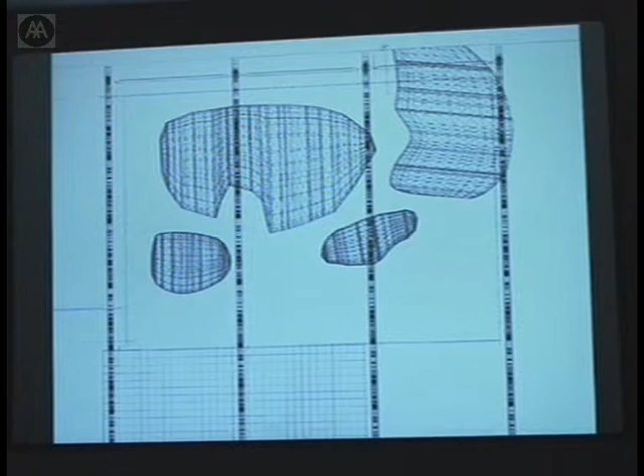These are very early sketches, ideas about—we had, in a sense, one of the big problems with Pompidou was that the floor for the space really was the only thing we could work with. We couldn't work with the walls, we couldn't work with the ceiling. So we decided to break the program down into these 4 elements and start to work with the floor, introducing the elements by slipping them under what we called a conceptual carpet, which was the floor, and deforming the carpet upwards.

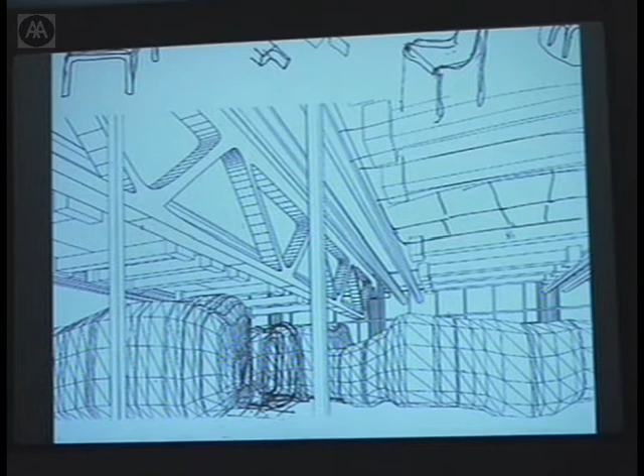These are part of a very simplistic sense of the structure of the space that exists. But this grid that's stretched up onto this carpet, through this deformation, is a grid related to the Centre Pompidou, in the way that right across the whole surface of the plan, we have increments coming down from 80, or going up from 80, 160, 320, 640, 1280. These become both the increments—the infill right through to the structure—and the determining elements.

So from that grid, we decided to use both the grid and the floor as our surface to work with, because of these constraints. And also, I think, because we wanted to take something which was neutral in its vocabulary, avoiding the vocabulary of Centre Pompidou, which is so extraordinary and specific that we all know about the tubes, color-coded in terms of a 60s structuralist approach to the outside and the inside of the building.

Our thing was to try and avoid that at any cost, but take something highly neutral. In this case, it was the grid and the floor. But at the same time, by deforming the floor and moving upwards with the different programs, we could create something new but working somehow with the building. That was very much out of an intention to make an intervention in the space and forge a new identity, a dialogue with the space.

That seemed very important, dealing with the history and what was architecturally implied with Pompidou, but was in some ways never fulfilled, and then moving on from that, forging ahead in a sense and trying to create something new from it.

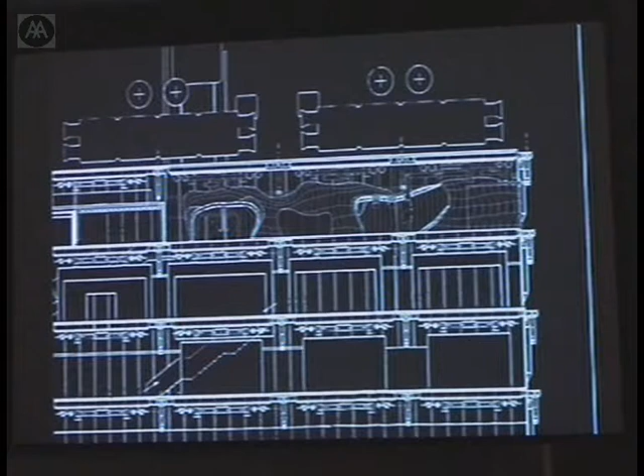This is the ducting on the outside of the Pompidou. This is the ducting on the lower level under the roof. These are air ducts, the big ones, and then you have electricity and water. So if we keep on moving, these are in a sense just conceptual developments of the piece.

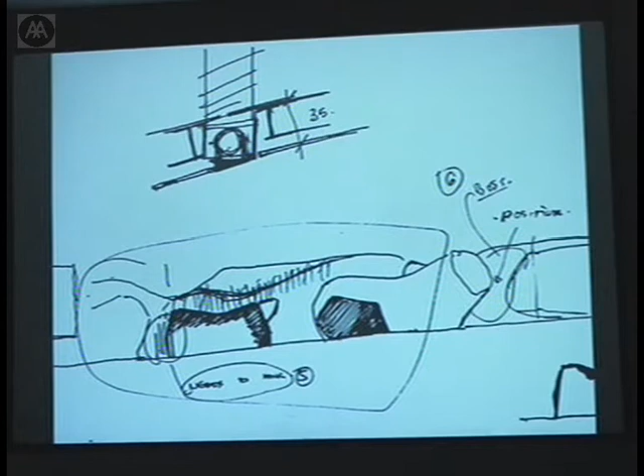As we move through, we come finally to a plan. So we jump from the conceptual stuff—I'll make a couple of fast jumps, otherwise it would prolong the issue. The entry is here, and the entry is here.

You come outside across the terrace at night, or you come through here, depending on what program is being run inside Pompidou. Pompidou is a very interesting situation—it's not just a restaurant, but for them it's also a meeting room, a private meeting room for Pompidou, so we can close up this volume.

It's red because, in a way, it tips our hat towards a space, a building, that Pompidou lived in for a couple of years while the centre's administration worked there, from '98 to 2000, while the whole building was being redone. We took the red, which was done by a fellow architect, as an identifying thing and as a memory for that period when the administration would come back into this building—also a clin d'oeil marking their space, because otherwise the doors open and the space becomes used by the rest of the restaurant. So there's a kind of double programmation, which is quite important.

Then the second space, important as a double programmation space, is the bar. Inside that bar we have a video presentation of artists presenting their work concurrently or coming up within Centre Pompidou. So Centre Pompidou is doing the programmation for the video within the bar, and that's interesting—you've got this kind of double overlap going on.

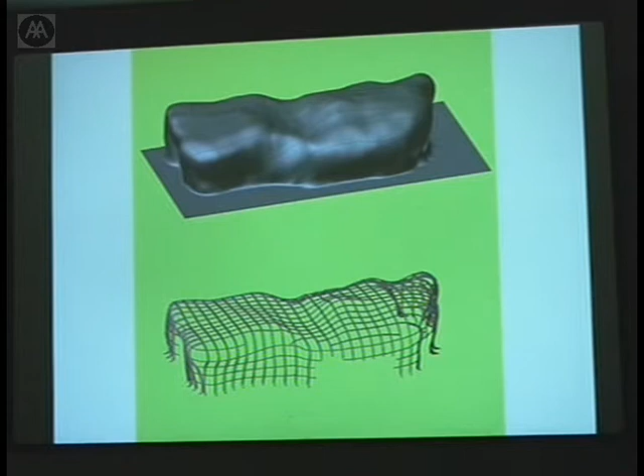For us, it's essentially a skinned project, so the structure becomes a secondary element, but important to show. We had to model all of these things, developing a way to bring the floor up onto the volume with quite a lot of precision.

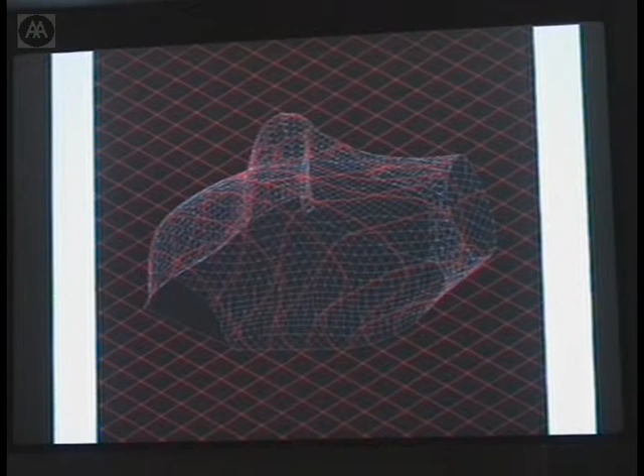Each volume also sits on hydraulic pumping springs, because the building of Pompidou moves backwards and forwards something like 17 centimetres from one side to the other on the short sides. So we had to make these volumes independent from the floor itself, as well as account for movement joints coming through the volume. Essentially, it led to the idea of putting them up on springs—under each volume it's essentially like a car with springs around all the edges.

These are studies. This is what I was talking about. Every one of these is a spring box, so the whole volume sits down. Extremely light volume. The structure is a 1 centimeter thick aluminium plate, and the skin is 4 millimeter thick aluminium. Essentially what we did then was we found...

I should tell you that Pompidou initiated the competition but did not have one centime, one penny, to pay for the project. So we had to create another competition with Pompidou to find an exploitant, someone who would both run the cafe and restaurant but also pay for all the work. We found a group called the Costes, who have become quite famous in France, being supportive of important pieces of design over about 20, 25 years. This family actually ended up being the ones that decided to build the project in its entirety. So it was a wonderful history of having a great patron, a great client in that sense, and something that surprised us all the way.

Anyway, the point of all that was to say going into fabrication, we had to find a company that would build these, and essentially we found boat builders in the south of France, who make yachts, a number of America's Cup yachts to their credit, but had never built anything to do with the architecture world. It was a great moment because this stuff's becoming less and less unusual. I think now we're working more and more with industries to do with aviation, boats, sport. More and more architects are diversifying. But certainly for us in 99 or 98, that was an interesting thing to do.

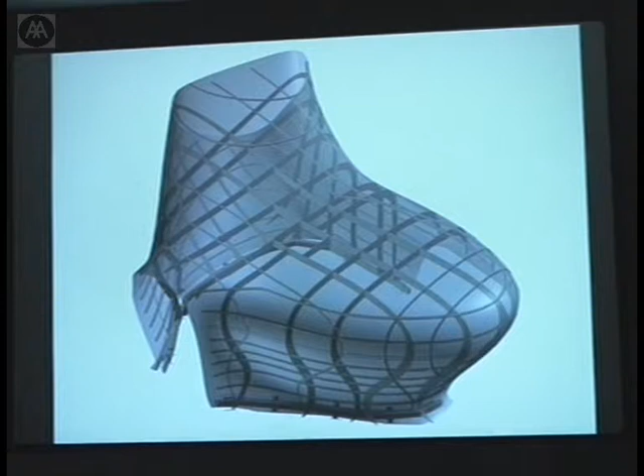I think it's still quite unusual. Luckily we also had a reasonable budget for this project, and we were able to accomplish things which are probably a little bit harder normally to accomplish.

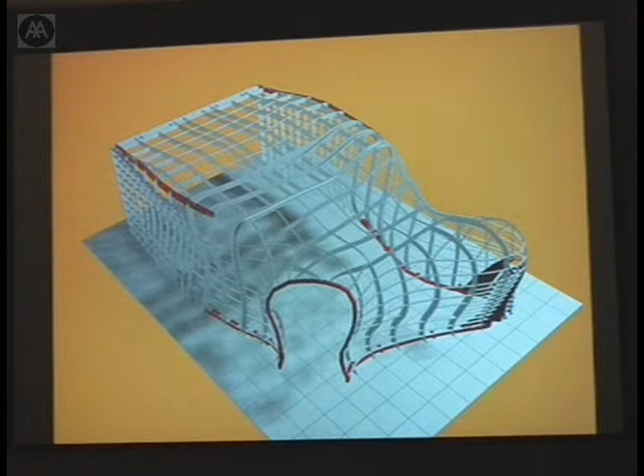Anyway, these are just diagrams showing the structural and skin studies. So we had a huge job of sending our numeric dossiers down to the boat builders. They in turn took the dossier from our software and translated it into software which they were using, two different softwares used only in the boat building industry, and then had to send it back to us, and us having to do the transformation. So it was a phenomenally laborious project, but under this kind of paranoia of time, working for the new millennium, which was good because it pushed the project.

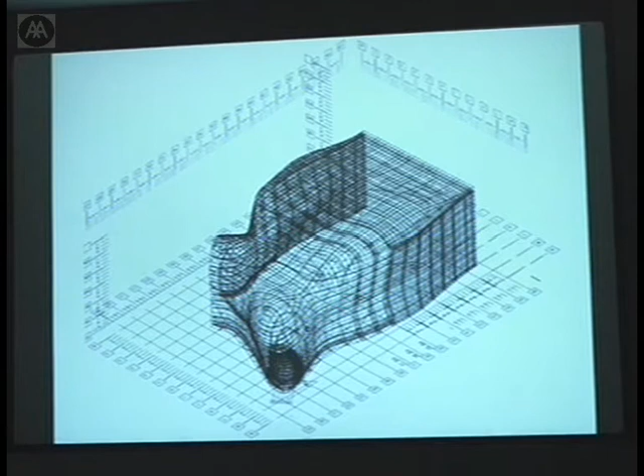These are studies by the engineers. We had a lot of lateral and vertical load studies of the piece. We worked with the engineers of RFR.

What was important for us was not actually to touch the appropriation, but to somehow direct it down into the volumes where we need it, but nothing more. So there's also an important word which would be appropriation, or redirection, of an existing system.

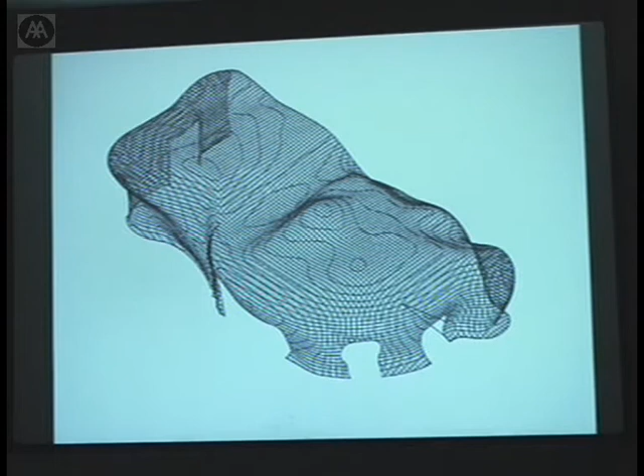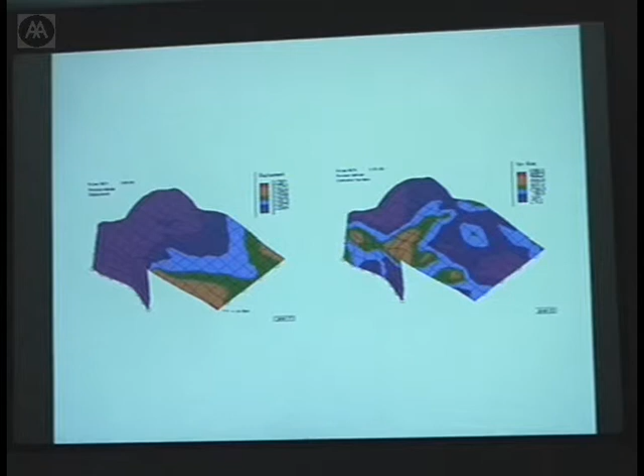Okay, so these are studies, of course, loading studies, displacement, deformation studies. And of course, these are pattern drawings.

We move on into the fabrication phase, which was an extraordinary experience because these are gigantic pieces that we had to build in their entirety, but each piece was already, a little bit like the hand sketch, broken down into a chunk. And the chunk actually corresponds with the maximum size of the lift of Pompidou, which is a gigantic lift.

But we had to bring every chunk by truck up to Paris and then deliver it between 6 and 7 o'clock in the morning, delivering these into the space.

So what we did in the south of France was we built all of these volumes as whole things, and then unbolted all of the pieces. So here you've both got the structure and the skin.

What was interesting in this, we worked with a machine which the company bought, thank God, during the phase. This is, you can see the size of the shop—it's gigantic, like really an aircraft hangar from much bigger boats. But they bought a machine called an Ecold machine, E-C-K-O-L-D, and it's really like a sunflower, which is an extraordinary machine that actually comes down on the surface with thousands of points, which either push down and stretch out, or stretch in, creating either a concave or a convex curve.

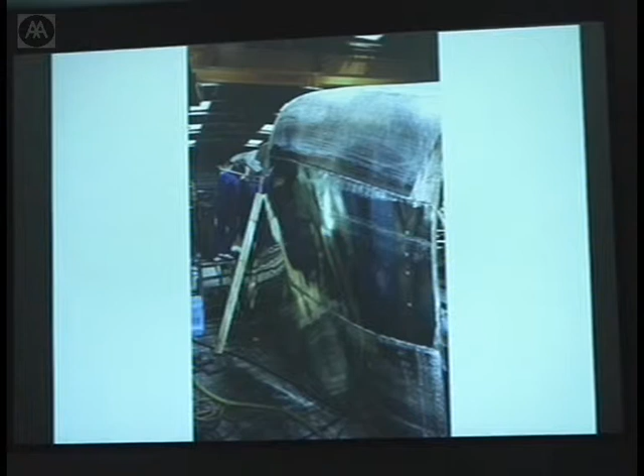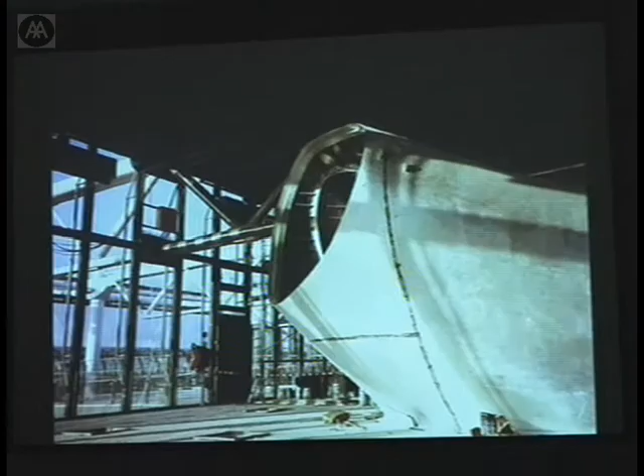And then once inside the Centre Pompidou, once having delivered the pieces, actually recoupling, rewelding, rejointing everything on site. So we had what was extraordinary—we had parallel crews. These guys that were usually building boats actually displaced and lived inside Paris for about 3 to 4 months, building these and receiving the stuff by truck from their own company. So that was quite an experience.

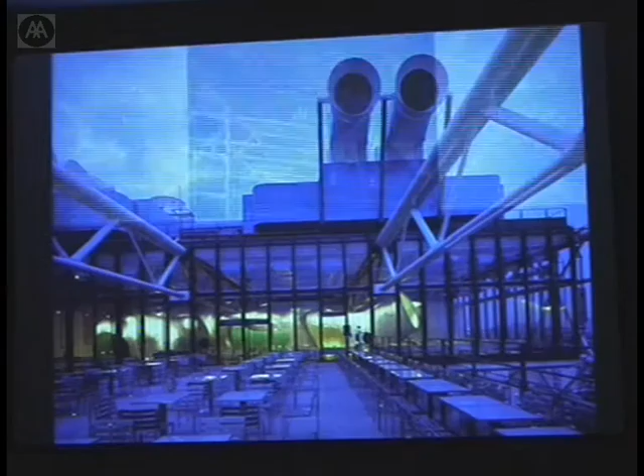And then here we are on the terrace. So it's an aluminium 4mm thick skin, extremely thin, but what's fantastic is by bending all of that, you can really accomplish some fantastic structural feats. I mean, these doors, in the end, become actually a lot of the structure, just through the pure bending of the material.

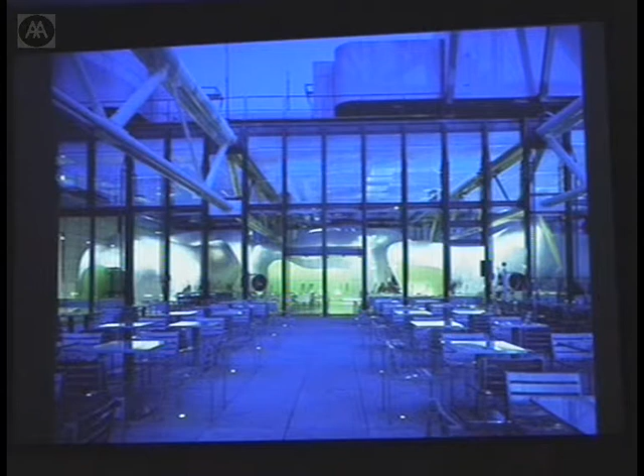And that's something we wanted to reveal also around the edges. There's a whole kind of thing about how we make the cuts—there are two kinds of cuts. Essentially we wanted the experience to either cut into or chop to create, for example, the windows. But essentially we wanted the experience to be very brutal, where once you were inside the volume, you really felt you were inside a closed volume, and it just happened to be cut in order to access light or physically enter into it. This was something about the continuity of the surface, while also having to work with the functional aspect of getting in and out of the volumes.

Okay, so these are then, of course, views around. Your floor is aluminium, your volumes are aluminium, coming severely down at some places and then deforming up in other places.

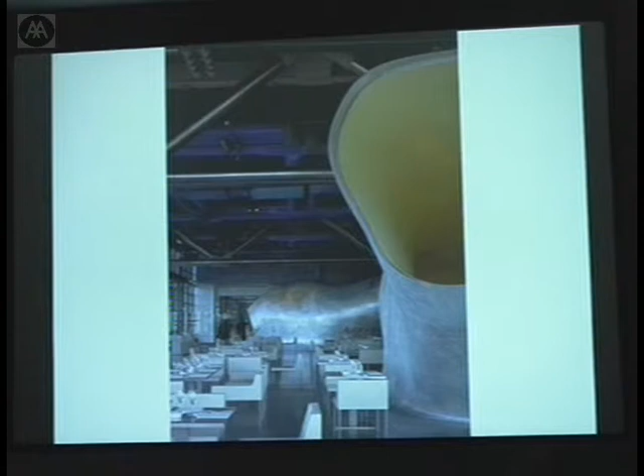What's extraordinary is the light inside the space, because, as you all know, Paris is a city of light, and the changing light is kind of fantastic. Really, here on the top floor of Pompidou, we have a panoramic movement of light right around the city, which is quite strong and forever changing throughout the day.

So inside each volume, we create a second skin, which is a rubber skin—again, 4mm thick. Essentially, we wanted that to be, in a way, almost like a suit, or like a kind of diving suit. We wanted the inside to be a floor which was, again, deformed up onto the surfaces. Here you see the aluminium left as simply as possible, the 4mm, and then you see the 4mm rubber here.

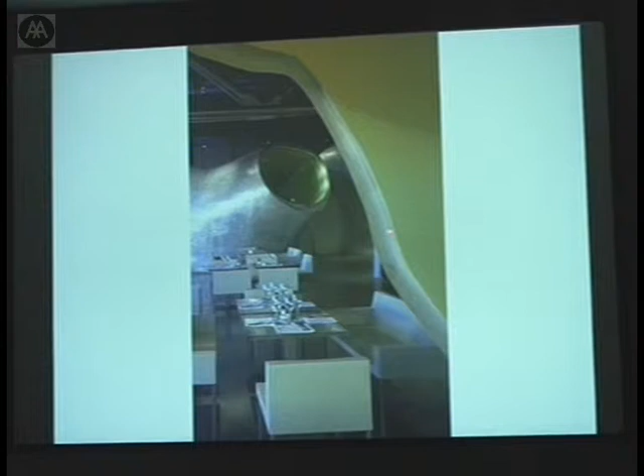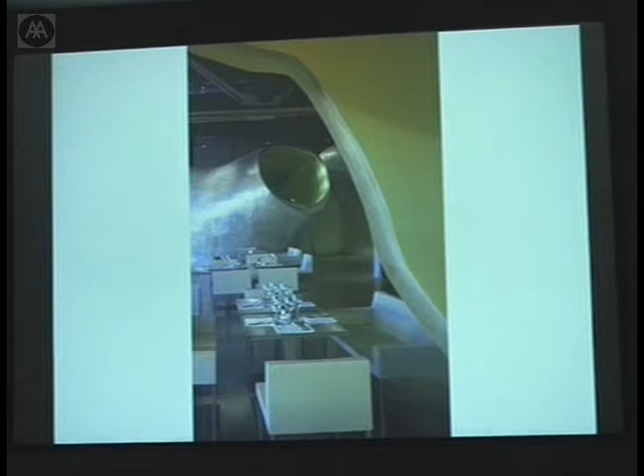And then there's an aluminium detail, an extruded element, which is set back in behind that. But we essentially wanted the two skins to read as one being a very soft, warmish interior space, and the other offsetting this kind of supposedly cold—but aluminium actually isn't that cold really.

This is moving around inside the bathrooms. The windows are important for us because they're moments where we get rid of the foreground, in a way, and jump the eye into the second and third foreground. It's all about people, for example, in the bathrooms looking at the ceiling, looking at how the ceiling is interacting with the bubbles. So we're trying to direct people's attention to certain things.

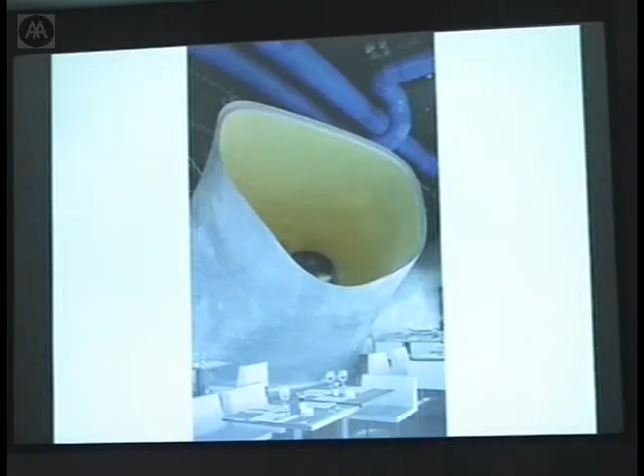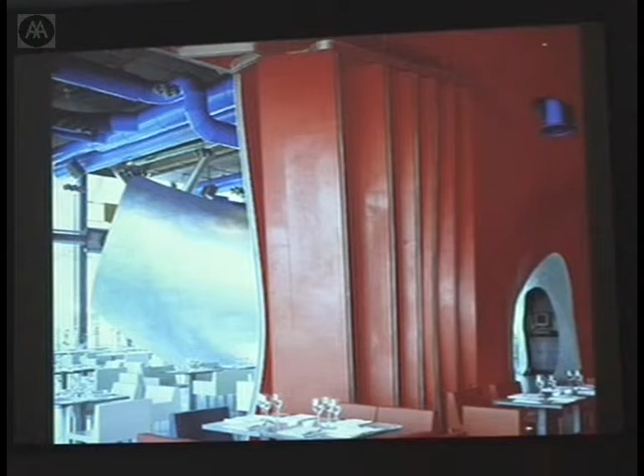This is the red volume I was talking about, which is closed by these big, gigantic sliding doors. Each of these panels is unique, as they're just cut out of the skin, and they close up to essentially form this as a private dining room, either for Pompidou, or it's open with the space itself. The rubber, the air being brought in, nothing fussy about this. The idea was to really keep it as brute or as simple as possible.

Now the next project I wanted to mention followed on from Pompidou, and it's essentially a bookshop in Paris. The lady who is our client for the bookshop came to us with an extremely small budget, but a great passion for selling artists' books. It's called Florence Lowy, Books by Artists.

Essentially there are books either conceptualized and fabricated by someone else, or literally fabricated by the artists themselves. An example would be pieces from the 60s and 70s, like icon pieces such as Ed Ruscha's Sunset Boulevard, being an example of an artist's book, or there's books by artists.

What's interesting is, as I said, she had a very tiny budget, and another problem: she had a space where half of her bookshop had to be stock and half had to be on display, in the same space for the public, so you would be in the space but might or might not be looking at her stock room. So instead of cutting the space in two in a caricatural way, we decided to keep the space in its entirety and make part of the stock room part of the experience of buying a book.

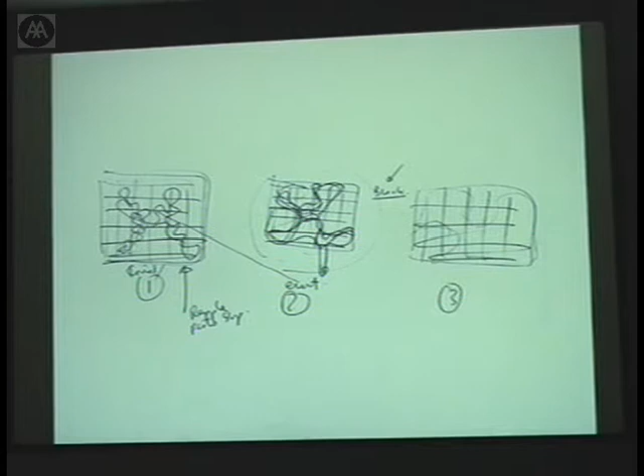By taking that matrice, which is really a 4 meter high volume, 3.5 meters, on a 45 square meter floor plate - very tiny really - we created this huge volume of books. Then this kind of movement path around these volumes created these extrusions, these vertical extrusions from this idiosyncratic movement path.

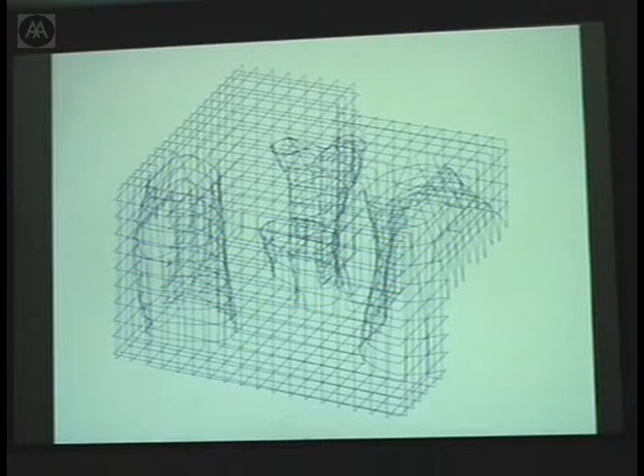By doing that, we wanted to evacuate all of the area which would be a circulation zone, and the zone that would be the leftover, which we called the decored object. So we had a coring and a decoring process, which then produced what we call these book totems.

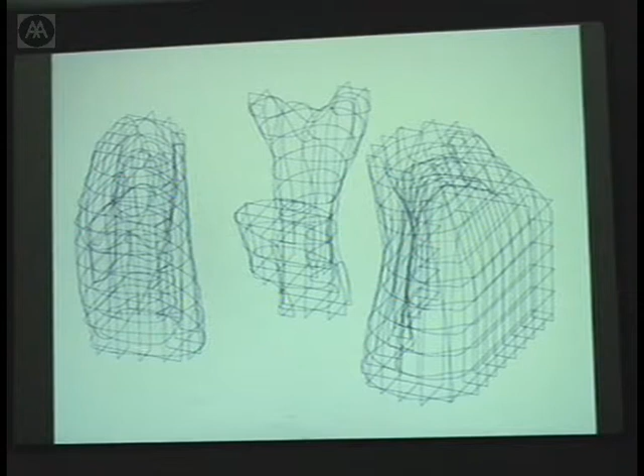But then the problem was not the totem itself, but also, which in a sense we'd prefigured, the issue of the books and the stacking - why not put the books on the inside of that totem because it was so large, and keep the outside for the spectator that walks around. So that's what led to these things, and this is the space.

The space is an 18th century building in the 4th arrondissement. We didn't touch it—all we did was really paint the walls and replace the floor. Essentially the intervention takes place in the floor.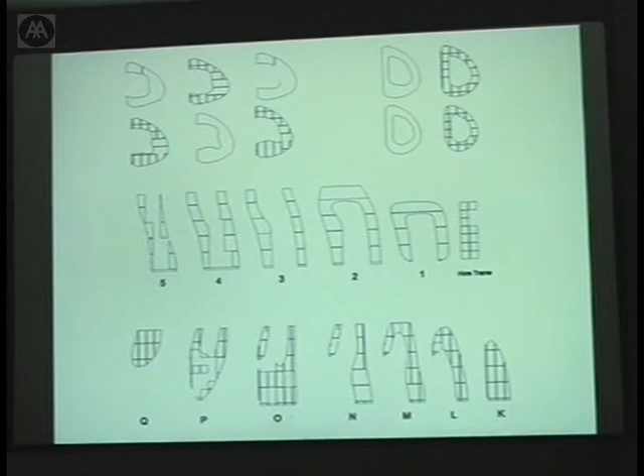These are the two volumes I talked about, which are empty, and these are virtual outtakes of that. Again, patterns of that, and the fabrication of that, done in Italy.

What for us was kind of extraordinary, and I mentioned that in relation to Pompidou—Pompidou was a skin project. We became quite fascinated, and that's why I wanted to show Pompidou. We became extremely fascinated with the structure, but we don't actually see the structure of Pompidou.

These are parallel things anyway. The book project being what it is, but I think what also helped lead to this was the interest in the Pompidou project—in the sense that the structure becomes both the volume and the skin; the skin is no longer there, the structure is the thing itself as well as its own structure. I think it becomes a very interesting development from the Pompidou project, one that maybe even interests me more, really.

Because of that, we said, well, why can't we, given all the numeric machinery we're using... Pompidou was certainly using artisanal, hands-on processes to make the exterior skins. In this case, we actually wanted to be absolutely hands-off on this project.

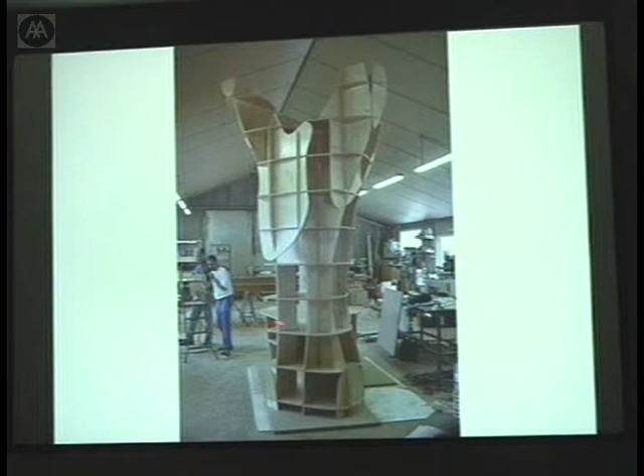We brought it to such a degree that the wood we were proposing already had a very thin melamine laminate on both sides, so we didn't have to varnish it. Essentially it's a 3D cutting machine which cuts each plate vertically, and then the plates are assembled much like an egg crate. So the hands-off aspect of this project is very important for us—seeing how far we could go in actually creating a fully numeric project.

So these are, of course, the fabrication stages, breaking the thing down. The whole thing breaks down into a series of donut-like elements, which are then joined using a kind of peg jointing inside the thickness of the plywood.

So we can see the beginning of the empty volumes up here. These are the volumes finished in the space. This is how we propose to show the books.

When we'd finished—or actually before we finished—Florence at one point was extremely nervous. She came to us and said, by the way, how did you think of doing the A to Z? How does that work in your space? And we said, well, it really doesn't.

I think it actually works in an extremely idiosyncratic way—it doesn't have an A to Z, basically. You come in and there's essentially groupings of interest or subjects. In a way I like that; I think it's much more intriguing and much more interesting. And certainly she was the kind of client ready to do that.

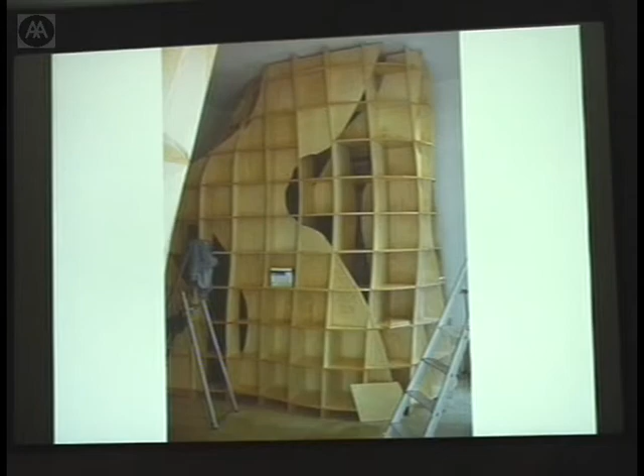And then all the books are stocked, of course, for the public on the outside. That's inside one of the volumes, looking up vertically.

So the next project I wanted to show you was a theatre in Rouen, in Normandy, which we actually finished more recently, but won a little earlier than the date shown here. Like some of these projects, it's a horror story of planning and timing. We had a mayor who was replaced by another, who was replaced by another, and from concept through to finished product it was about 7 years, which is extraordinary. By that time you're almost forgetting what you did. But thank God we got the thing built. The concept was very simple, but the project and the space we were working in was rather complex, and certainly its history was complex.

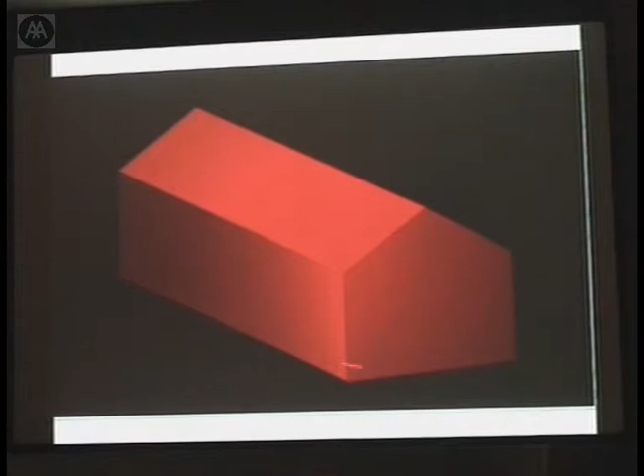I'm not showing you the building itself, which is unfortunate because I did have some images. But the building we worked in was an old theatre that had been converted in the 1970s from a cinema, which was itself converted around 1915 from a series of row houses. These row houses essentially formed a gable element like this, cut into about 3 or 4 row houses.

What we decided was that we were extremely interested in that history. We thought it was important to somehow go back and realize the different aspects of that history. So we took, in a way, the domestic volume, because that was the first history, and then the next history, but also the last history, which was the theatre.

Now, the competition asked us to improve two things: one was the acoustic conditions, and the other was the sight lines. There were two major problems, because for a cinema it had worked perfectly well, but for a theatre, of course, the two things are too contrasting. What we essentially had to do was make a much steeper floor.

So we had to push the real floor, change it, and create a new false floor. For the acoustic problems, we had to bring down the ceiling and create a series of faceted, chopped layers, which would give us the acoustical effect we wanted - a fast rebound for the actor on stage, but also other sounds coming into the auditorium and rebouncing back for the public. In the back there was a problem of absorption, but we didn't get involved in that.

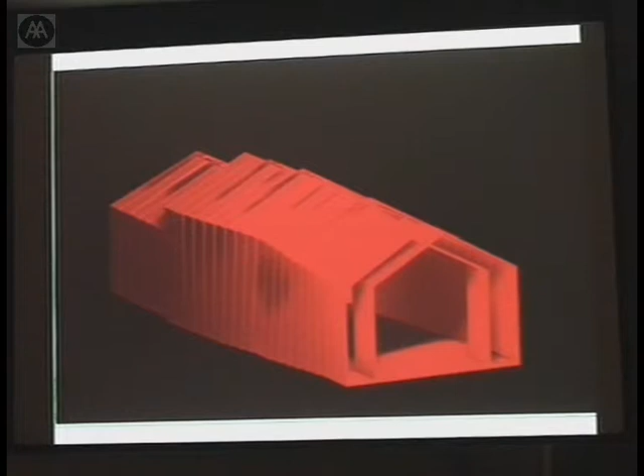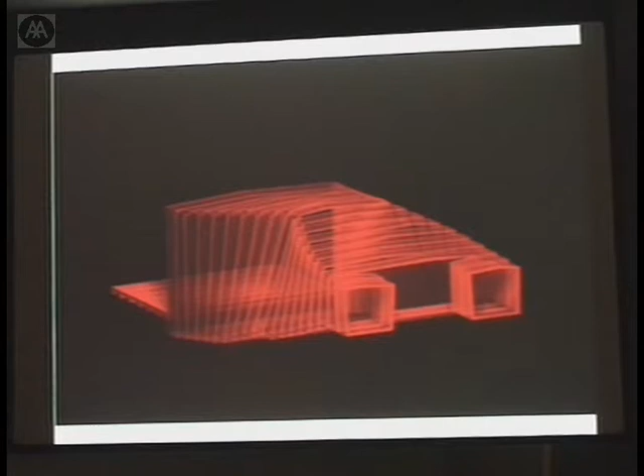So then we come through, and the piece becomes more and more deformed. We knew where our levels had to be, and we also knew we had to get two exit and entry openings into the volume from this end. So that's why the thing starts to deform. And then ultimately - well, you saw the last image anyway.

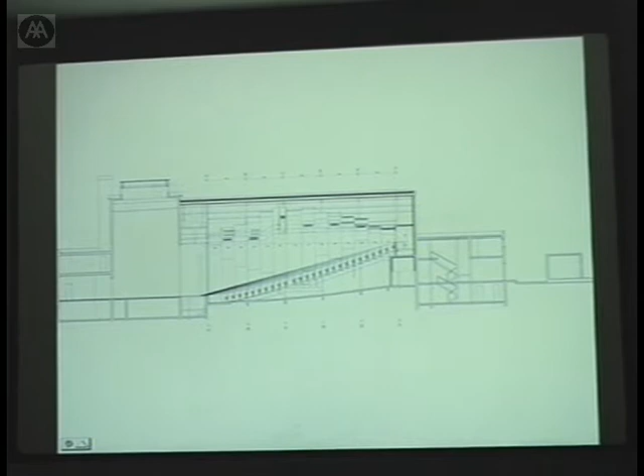Ultimately we come to this section. This is the existing building, and this is the existing rake I was telling you about inside the cinema space. And then ultimately we come to our new piece - really it's like a kind of stomach within an earlier building. If we keep going, you have this kind of slicing thing going on, and that's the piece in section.

Again, it's an extremely low budget project - we had very, very little money to play with. Really these are wood panels that are painted, very simple, but they create, I think, and apparently everyone agrees, a very rich acoustical quality inside the auditorium.

Maison H is a house that, in fact, we've never realized. It's a project where an extraordinary client came to us, who had been one of these great French success stories with the internet, created his own industry in a sense, built his own company, went on the stock market, and became extremely rich in a very short period of time.

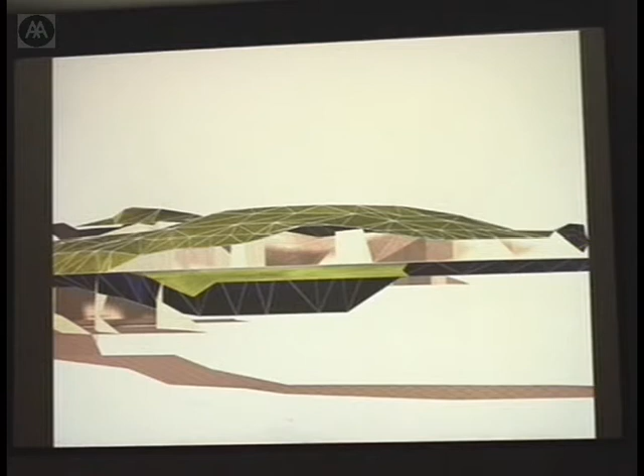So we were very interested in this issue of paths. And then actually also trying to almost treat the whole site as his house, which is when I was talking about the 2.2 hectares, that's why I thought it is for us quite an important notion. So that the house is no longer an object, the house is the landscape, or vice versa.

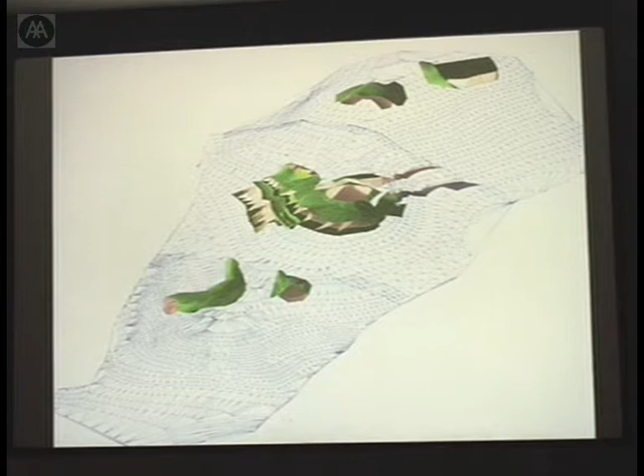And so these are very early studies where we became sort of interested in trying to find this relationship between paths, the land, an interior program which would somehow be both half in the site and half out of the site. Where the site itself became kind of ambiguous as to where the actual site ended and the house began. Here there's some kind of crude beginnings of those elements.

These are different pieces. This is a kind of tennis court thing. This is where he wanted a space for a sort of Zen meditation. This is the breakfast. This is the lunch. This is the major house element itself. And then some of these became a bit more developed later on.

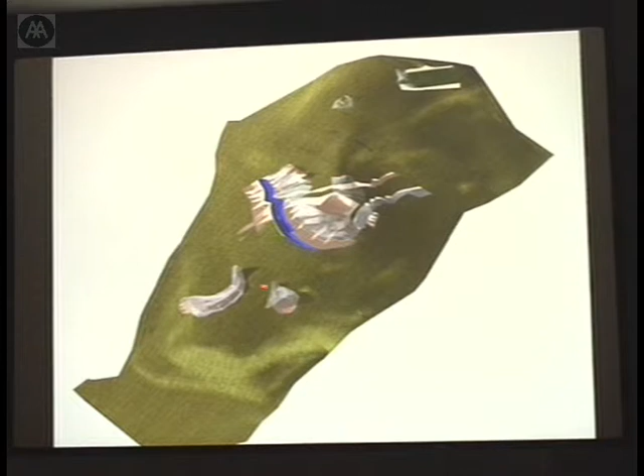So as we're moving round, essentially what we became very interested in was trying to take the topographic lines, developing those into a matrice, or a matrix that would run right across the whole site, and then from that matrix actually develop a new synthetic skin that would become the roof as well as the walls in some places, as well as actually extruded down both the walls and the floor of the interiors.

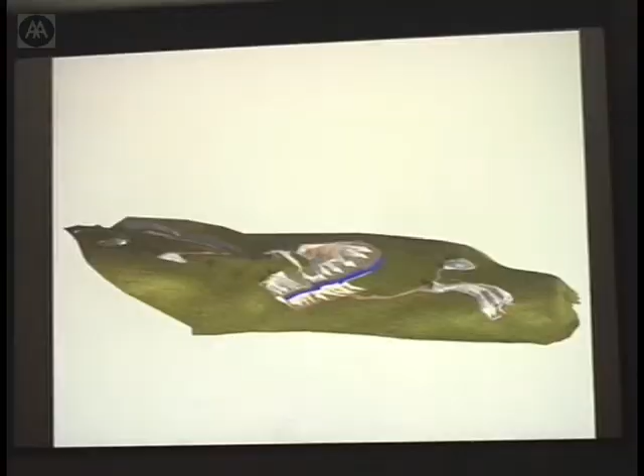What's very interesting with that is that all of a sudden with these drops across the site, we were also finding that we could both leave the matrix to determine actually also views out onto different aspects of the landscape as well as the ocean. So in a strange kind of way, there's a kind of synthetic naturalism that happens with the house.

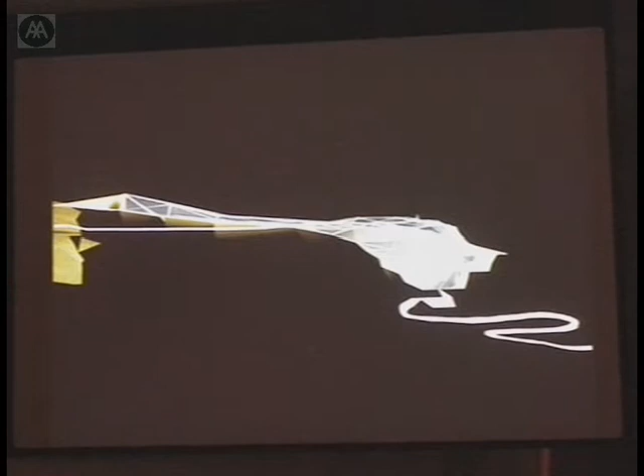This is just a kind of almost a caricature of a path abruptly piercing one of these things. And as we develop how to get the path, or the insides of that becoming a kind of path, or these becoming, in a sense, ways of circulation, but also programmatic layers, topographic layers underneath the roof, giving an idea of scale.

Now, at this point, we concentrated on one which was called the Maison Lunch. And this is a piece which we've exposed in the last Biennale as well as in a number of places around the world. We have not got anywhere close to building the house. The client says someday, but I think it's kind of a dream.

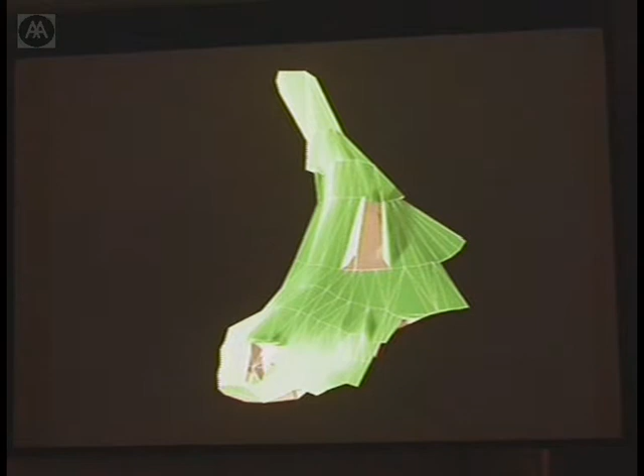But funnily enough, it's been kind of an extraordinary project because we've, in a way, kept on developing it in the office, and I kind of like the aspect of that.

The roof, then we start to open here, and this became a very important moment because we said, well, why couldn't we actually open not only windows but also the roof up?

The important thing is that this part of Corsica gets extremely hot and extremely cold. In summertime, there's a whole issue about placing your body in different parts of the house in order to always be close to the movement of cooling air. So we said, why can't the roof be something that's operated both meteorologically and by the movement of someone inside the house. So we have a whole series of tropic movements, related to biorhythms but also functional necessities.

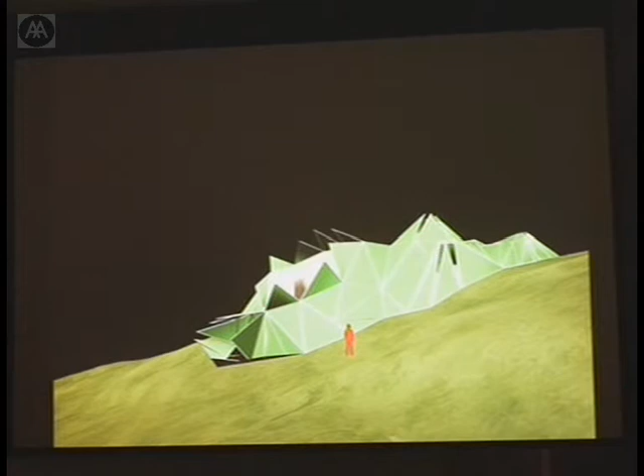This is where we were heading, essentially where we stopped the project with the client. These are earlier studies, and this is the more recent one. So you've got this opening matrix that starts opening and closing, directing different interests—whether it's entering the house, or letting wind or light into the different rooms or circulation spaces.

Is it possible you could help me with that? I just wanted to show a very short film, and I'm not too sure because I didn't quite understand how you're...

Yep, that's great. Okay, super.

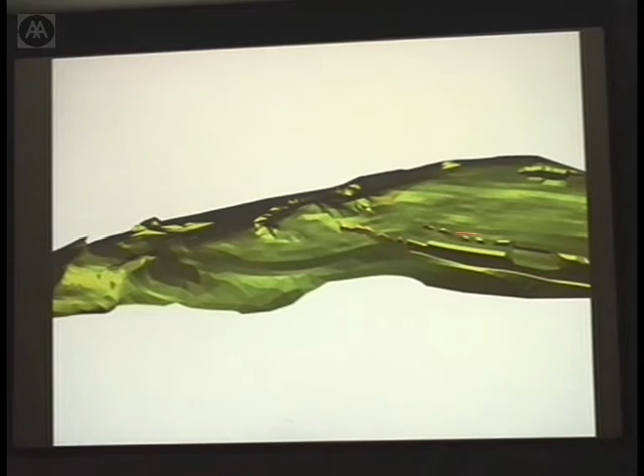So this is the site that's modelled—for us it's very much the house, the whole thing we consider a house. This is the top part of the site. This is the part you come in on, this road piece, and then the path that comes in off that and dives under the mountain here.

You've got to imagine a certain amount of this with bush, but on the other side it's quite barren—bush in the foreground, coming up to a rather barren part here. You can start to see how we imagine these different elements operating. This is a courtyard, an open space underneath the top of the mountain. In the background here are the tennis courts.

Here are a series of living rooms, this is going to the maison lunch. This is what he was trying to do—we didn't really define it too much, but the idea was a music space, a music pavilion.

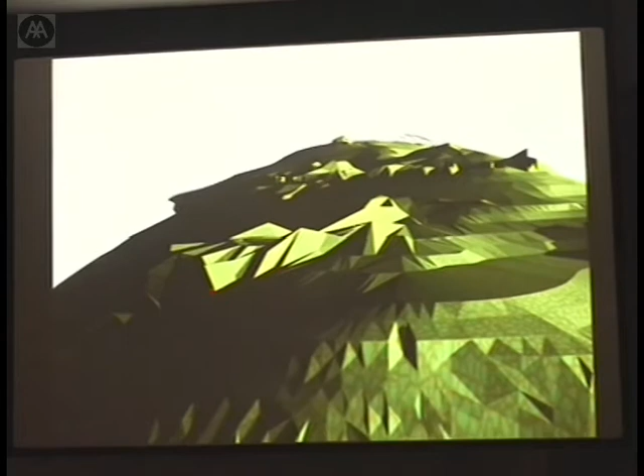So we're coming around the maison lunch now, which was the element I was telling you about. This is the Zen pavilion at the top of the site.

The important thing for us also was what would be the actual stuff, the material, for this eventually. We started looking at imagining a kind of synthetic material that looked like vegetal material. We became extremely interested in the idea—is it not possible to make something synthetic but growing? At some point we tried to look into this, but we didn't get any further.

If I can just go back to the main from that—we didn't really get any further at that point, and we didn't stop the thing. Of course it's ongoing, still an ongoing interest as to how we do that. And then we come back into this one.

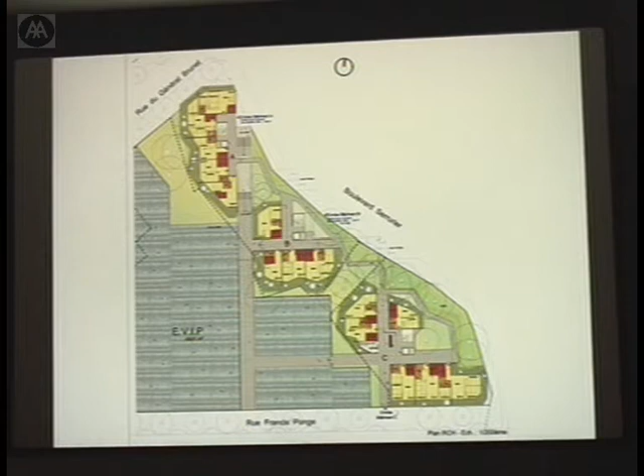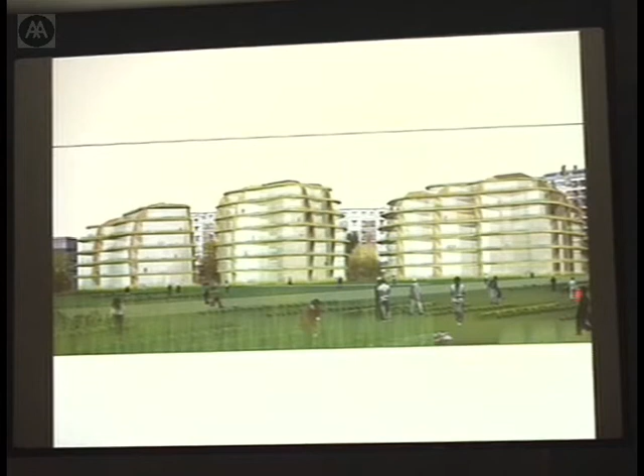So these become the volumes which are related to those setback problems. The resulting cutouts, or decored elements, from this gigantic matrix—which you can only imagine—give us these kind of resultant pieces.

The ground floor, in terms of its program, is quite interesting—it's very careful work between the logement and the exterior. It's for heavily, very handicapped people, and then all of the rest is social housing.

It's the first project in Paris built under a guideline called the HQE, the High Quality Environmental standard. These are rules that I think we have in Britain, and they've probably existed in Germany for about 30 years. But France, in terms of environmental issues, is extremely slow to move. Recently though they've introduced this legislation where you have to come up with all the environmental rules, the classic ones.

If you build this out of concrete, what is the concrete? If you break it, is it reusable? What kind of energy goes into producing the different materials in the project? Can they be proven environmentally friendly, etc.? It goes on down the list.

But what we did was manage to create a building from these lists of severe constraints, resulting in interesting logements, or apartments. They're traversant in French, meaning they have light on both sides of the plan.

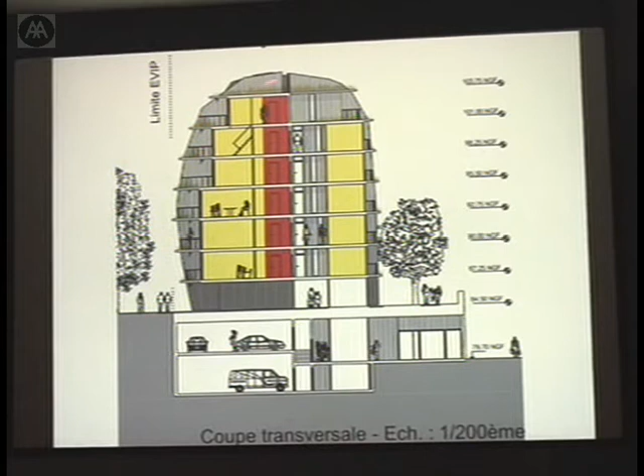This gives you an idea of those balconies. What was interesting is that we were able to offset the extraordinary rigor of the plan, being a very orthogonal thing, with the costing of doing something like this. This is where one starts to invest the money in terms of costs, if we're going to talk about that.

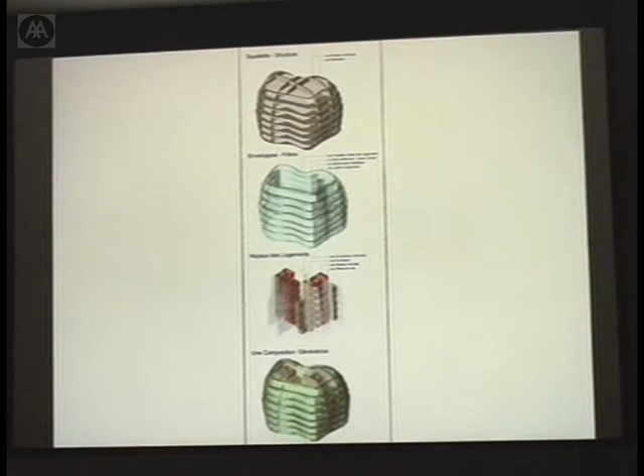This gives you an idea of the layering. Here we have the matrice. Here we have the layers, these plastic screens that are openable or closable by each tenant within the building. Then what they call the noyau de logement, which has to do with the way heat, air, and fluids are kept within the core center of the building, related also to environmental arguments. And this is another view from the back side of the site.

Another project I wanted to show was finished in January this year, the Communication Center for Renault. What's interesting with the site is there's a very unusual island here called Ile Séguin, which is the island where Ando was going to build his museum, but that's essentially changed now in Paris — he's no longer going to build a big museum on this site.

This area, called the trapeze, as well as the island, was the gigantic center for Renault car production. In the 1980s they decentralized, and all of this became vacant land. Essentially, one of the only projects they kept and didn't destroy was a building built in the 1980s by a French architect called Claude Vasconi.

It's an interesting building because it has a sawtoothed roof, quite unique in that it starts very low, middle height, and then very high towards this end. It was, in a sense, the tool shop for Renault, with offices at this end of the site.

This is the building as we found it when we did the competition — essentially an empty skeleton, a very beautiful empty skeleton, looking towards the lower areas and the middle height areas. Just to give you an idea, this is 9 meters to the underside there, and up here it's a 12-meter high space.

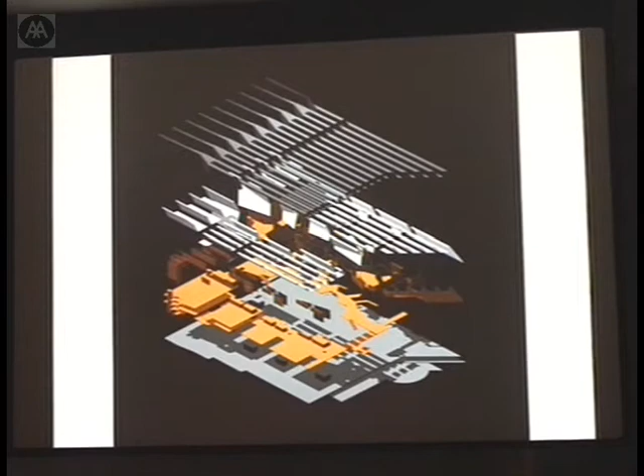So in a north-south sense we have a whole series of secondary walls which are set back. The white walls, interestingly, are fabricated by a company that makes aeroplane wings as well as nose pieces in Toulouse, for the Toulouse industry, and has also been working with Airbus on the latest 380, the biggest plane.

What they made for us here was all of the white walls in honeycomb, which is aluminium sheets with a honeycomb structure in the middle, making it extremely light — very interesting for us because we wanted to float or hold above the ground as much as possible with this project.

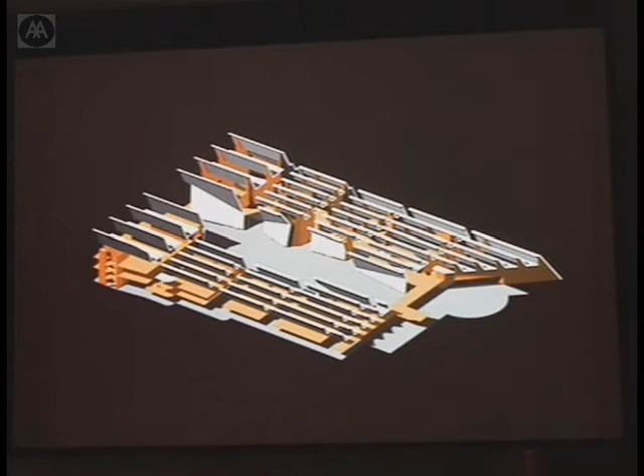These are the offices I talked about, and on the southern side a whole series of rooms. In French we call them a cimaise. The cimaise is interesting because it's ambiguous — it has the role of an exhibition wall for art, in a traditional beaux-arts sense, and it's also a wall of sorts, with a functional reason as well.

For us, we play between the two, because it isn't so much something to attach art to, but really to project art off, or onto, imagery to do with the exhibition space.

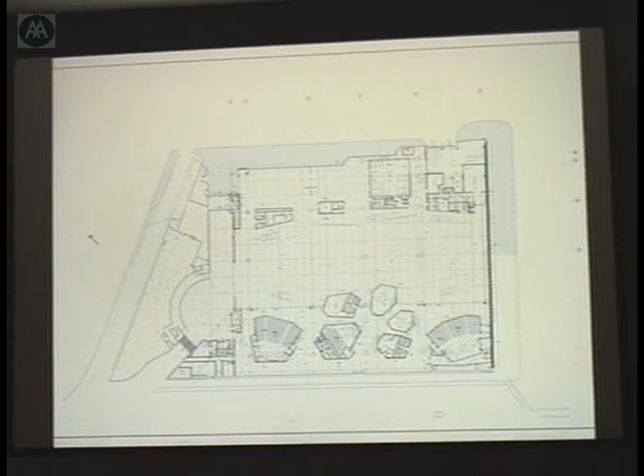So we enter from here, a big exhibition space of 6,500 square meters, a series of amphitheaters. What's interesting is that you come in through major circulation in the south, then through these secondary streets — it's an extremely urban project inside.

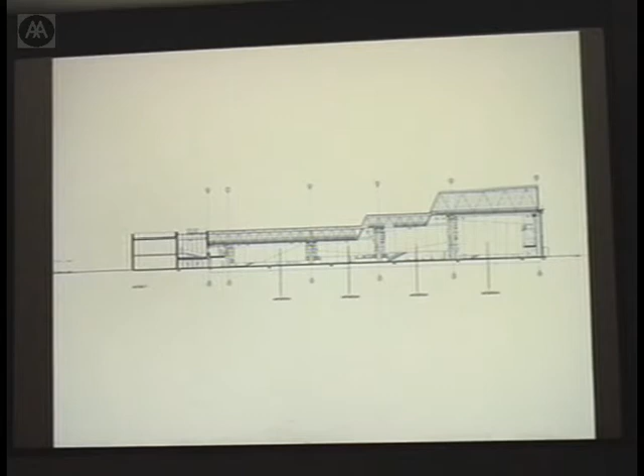Coming into these secondary streets, you come into a series of light wells. If we keep going all around, this is the mezzanine level, with the cimaise facing into it, at which point you can circumnavigate the space. This is a section through part of the building, the long section, and a cross section with the cimaise walls.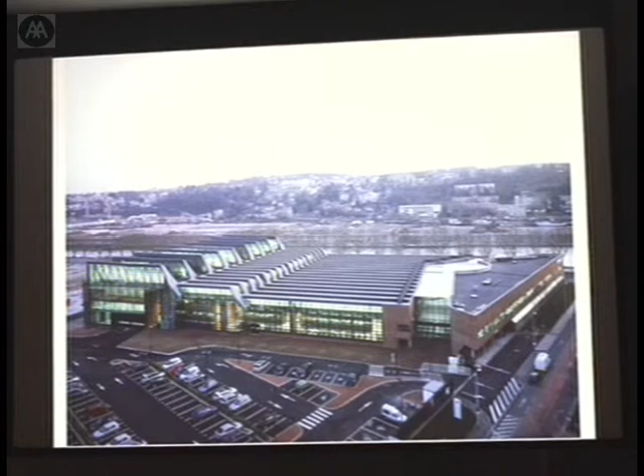There are huge doors at this end of the space with a walkway that moves up hydraulically, so we can get a bus as big as a real bus into the space. The idea is that they will eventually do about three exhibitions a year, all related to the motor car.

Renault, not unlike Peugeot or other companies, moved in the 90s toward making a parallel discussion between itself, architecture, art, and culture—not just a parallel, but mixing all of that. This space tries to do that. There's an internal strategy behind Renault, behind the space, to create it as a cultural space for the car. That's also why there's a parallel reason for the white walls—to reflect light coming down and bouncing it around inside the space, but also to create that relationship where it's not a museum, but a space for exhibiting and presenting the car as a kind of cultural object. So there's that strategy behind the client's interests.

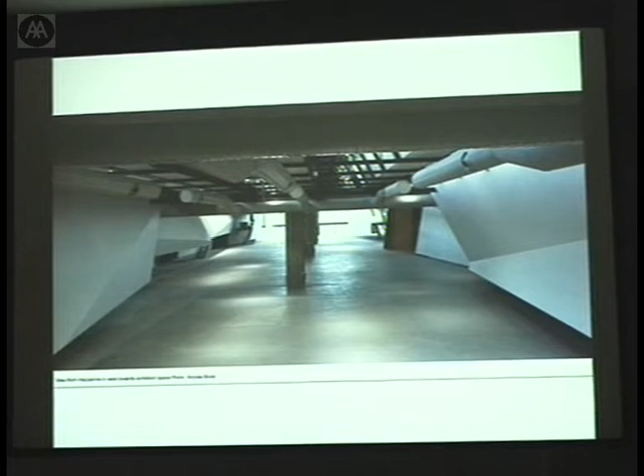These are the wood walls I was talking about, oriented in a north-south sense, looking down from the mezzanine into this exhibition space. You can imagine it filled with different exhibitions in the future—so these are kind of empty images in a sense.

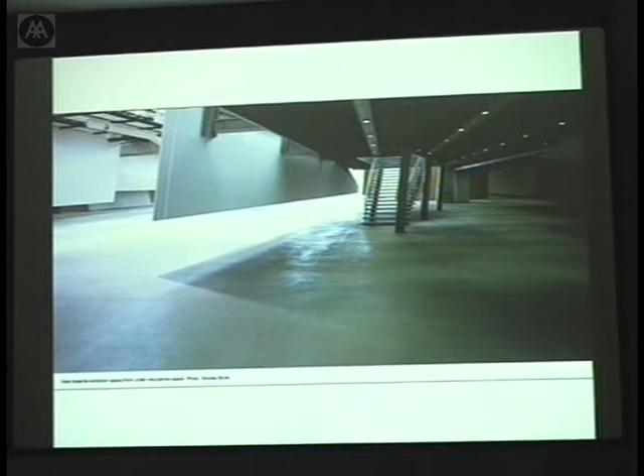So these are the walls that hang off and hang from the roof and also hang off the steel structure. Again, there are walkways that come around, up, down, up, down—we have like 8 staircases that jump around. They give the viewer, the spectator, multiple views, both from above and below, of exhibitions going on. So it's an extremely active space, and yet at the same time it's a very, very large space—it's got this curious double nature to it.

This is looking into one of the theatres. It's big enough that we open the doors and drive in here, and each theatre has a rotating turntable on which the car is presented.

I like this theatre probably the most because it's for 100 people, so it's extremely intimate, and very steep—a bit like a 19th century surgical theatre, a London school type I've never been to, but I imagine in 19th century engravings of students looking down watching a cadaver or something. In this case, it's the car. It's also interesting because it has a double way of operating—as a staircase and also an informal way of entering a theatre, normally through here.

This is inside the theatre, this is the rotating plate. The car in this case is definitely the centre of the défilé—the centre of the action, and very much the object of desire.

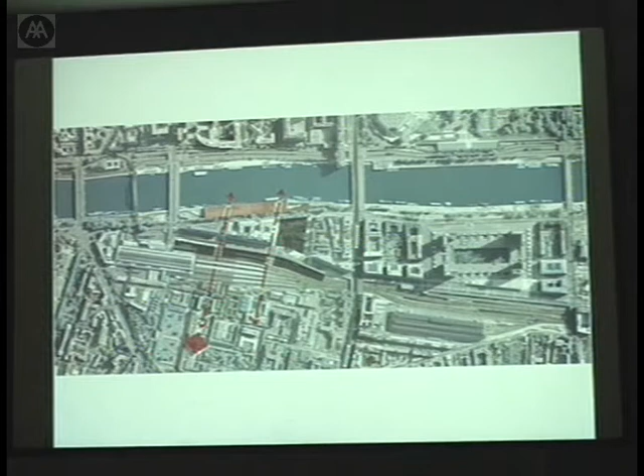And it's a very interesting piece, extremely simple. They decided that they were actually going to demolish it about 10 years ago, and then there was this ongoing fight about what to do with it. Essentially, the proposition given to us was whether we wanted to keep it or propose to demolish it. I think it was obviously an interesting project, so in our minds, we decided to keep it because we wanted to do something with it. Most people did keep it anyway because it is an interesting project.

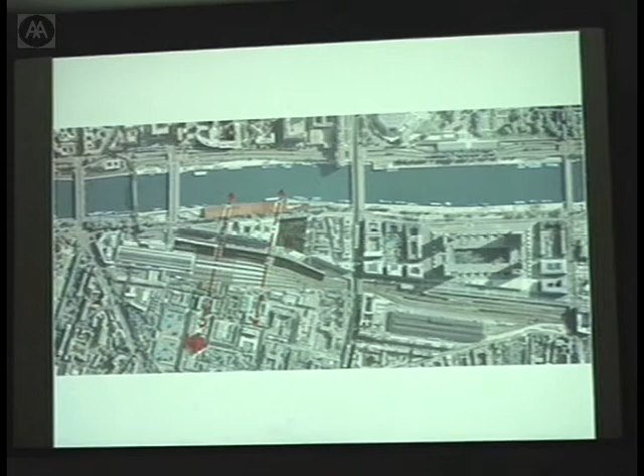The problems here are quite interesting. In the back you have a thing called the rapid transport, which is actually a fast freeway under the building that used to be a train line.

This building is interesting because historically, barges like this one pulled up alongside, and there were gantries on top, a smaller version, a series of them on the roof, that would bring the goods from the barge up into either this level or this level of this huge, gigantic stockroom. Then horse and dray would come in from the back of the street to take away the stuff, around the turn of the century, or a train underneath would also take some of the goods. What's interesting is that today it's an extremely rundown project.

It is like that today, and our proposition is the following. It was an international competition.

We were again, I guess the British group that was most known would be Future Systems. We won with a project where essentially the problem given to us was that we had to cut the building here, creating a huge courtyard, an opening. So that was part of the urban rules.

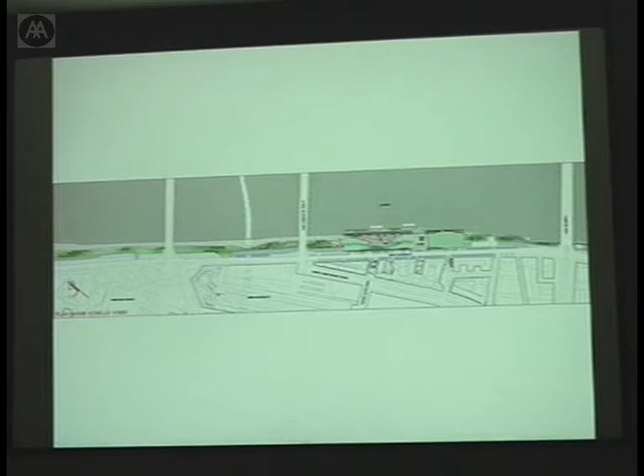Essentially what we decided was to propose something for the continuity of the edge of the Seine, making a large urban project that would dialogue both with the building, the grid of the building, and the new project. This is a plan mass looking down on top of the roof.

What we decided here was to take the structure. The structure is very interesting because you go A, B, and then A - those bays break down into a 7.5 and then a 10 meter increment all the way along. What we took from that was a 2.5 meter increment and created a new project, which is in a sense a phantomatic image of that structure, overlaid over the top.

And what we created was something we call the plug over. The plug over is essentially a creature that is able to bring people up on the sides of the building. We build out over the water of the Seine, which we could - we had a gabarit, or building limit, to build out into, and then we could only build up one floor above the existing building. So essentially all of our new project is on the outside of the existing building - all of the move, in a sense.

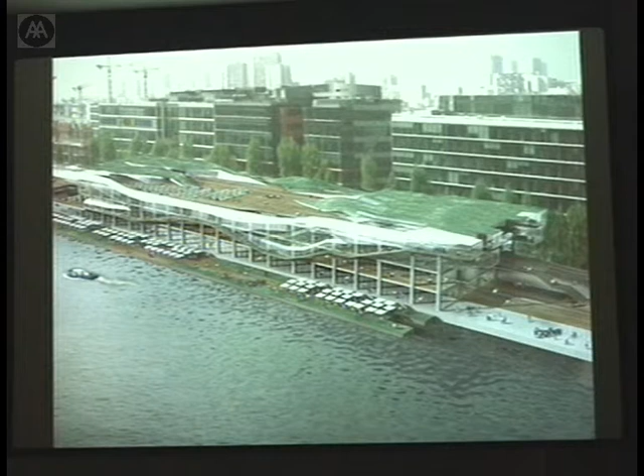Anyway, it's an interesting crowd, a really great crowd. And so what's interesting for Paris is it's really the first time we're able to bring both design and fashion together. They've been completely separate things. For a long time, both worlds have been fascinated in how to bring about that combination.

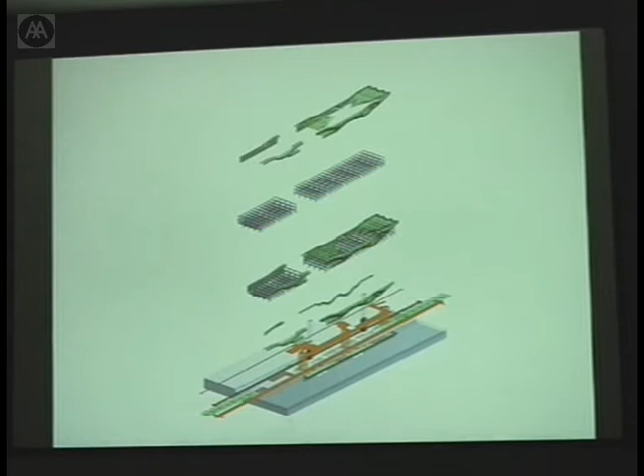And certainly they've been working at it, but they've never really had the opportunity on a site. And thank God, in this particular case, we had a client. I should say everyone on the competition had.

It was a very interesting competition because you had, as an architect, not just to design it, but you had to design the program yourself. So you had to come up with the people that would be filling the building in the future. And then you had to essentially get a letter from all of them stating that they were interested in developing the project, etc. So our project that we developed with our developer in this case was orientated towards fashion and design.

And so that was a very, very interesting experience because we're not just working as designers anymore, we're working as programmers, and we're programming our own architecture.

And at that point it's very interesting because all of a sudden you find this potentially fantastic liberty. It's not so extraordinary because of course there's other defaults with the idea, but it's a very interesting one.

In this case, we were able to actually interview these people, talk to them, try and bring them into the process at the very beginning, and actually be part of that idea of fusioning both the fashion world and the design world. So that's a truly kind of remarkable thing, I think, about the project in terms of the programming.

These are just kind of straightforward, the existing structure, the skin, the combinations, the different problems, circulations, both longitudinally, the different programming needs, the different levels. These are images, of course, at the competition level.

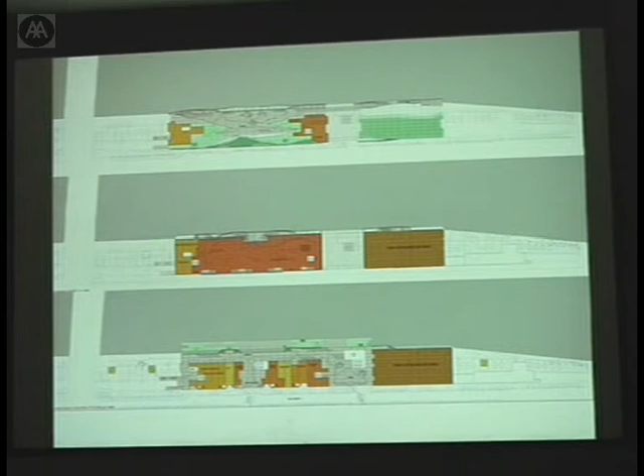We're now in a much more advanced stage, but it's the big project in the office right now. Essentially, these smaller programs on the lower level, etc., moving up and then up onto the roof. The plug over being, of course, the green element, which is a kind of both a landscape on the roof, and you saw in the axonometric image.

So it'll be a growing roof, as well as a series of kind of green glasses, we're hoping, which we're working with. The idea of the green also is a very interesting thing, because of course it will be breaking down the heat intake. The glass over the Seine, the walkway over the Seine, is an open walkway, so there's no problems.

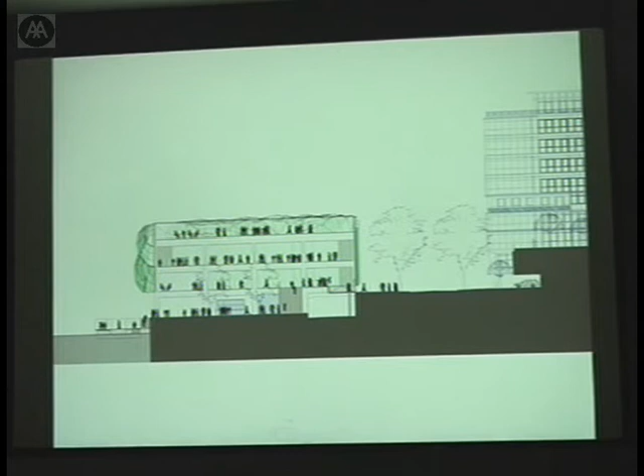We resolve part of the problem of the heat loading here, because actually our real facade is there, and at the same time we protect people from wind and rain, but at the same time we're an extraordinary volume, but done in a very simple single glass. I'm getting very technical this evening, I don't know why, anyway.

But, and then this is of course another cut. We have here a floating pontoon, which we're hoping we'll still keep in the project, which essentially, in summertime, is like a series of kiosks, because the Seine is actually flooding, the flooding level is about here. So every number of years, supposedly, we will be under flood, which is an interesting experience.

So essentially, we've done all of these kind of calculations. But what it leads to is all of this is a very éphémère architecture. We cannot make anything permanent, and there's a whole thing about how the water washes right through the space. You cannot have walls.

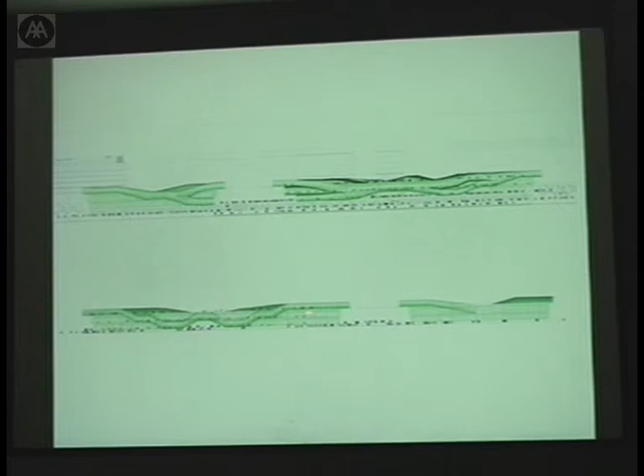Anyway, these are the different elevations. As I said, they're essentially glass. Looking at these, they're very simple perspectives, looking from the big public space across.

In front of the building we'll have two things: a water taxi pulling up, as well as a bateau mouche pulling up. This will be a kind of bateau bus which goes up and down the Seine, which has already started but will be much more important in the future. One of the stops will be here in front of the building, so we should have quite an interesting movement of people.

Coming to the site, it has this strange issue of tourism, as well as, we hope, being a very local kind of scape for people within the city of Paris—a place where they can come for exhibitions, for buying music discs, book editions, hanging out at cafes, restaurants.

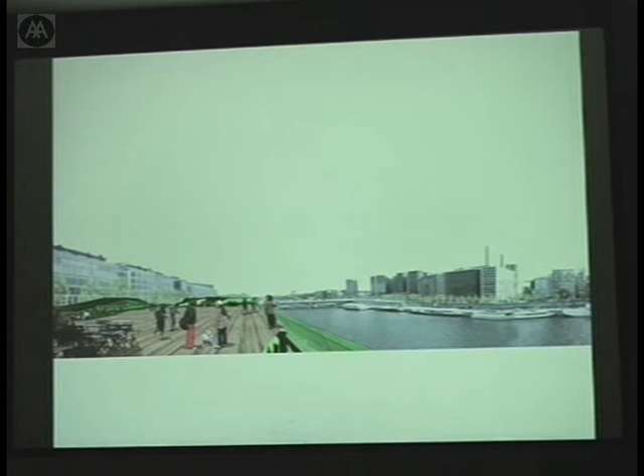Anyway, that's the general push of the project. And as you can see, the context is a curious one, because it's very much a kind of Paris of the 1970s and then 80s, etc. So it's interesting—it's not the historical Paris, which is just down there, so we'll be able to faintly see it. But I think for us that's an interesting thing to be involved in—the fact that we're involved now in a project which is moving outside of the old centre of Paris. So essentially, that's it.